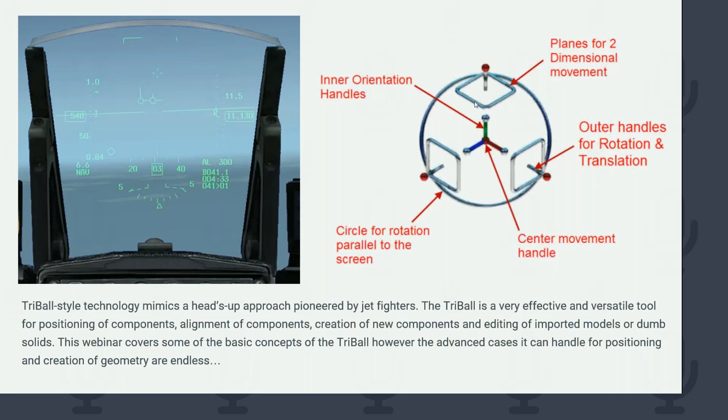This point, the conference will actually be recorded, because I had forgotten to record it from here. But so here we go.

But let's actually talk about what we can do with it. I want to get right into a presentation on the product. So there are a series of webinars that we've done that are really making your design life easy. And so the first one is on feature modeling. So I'm going to jump straight in.

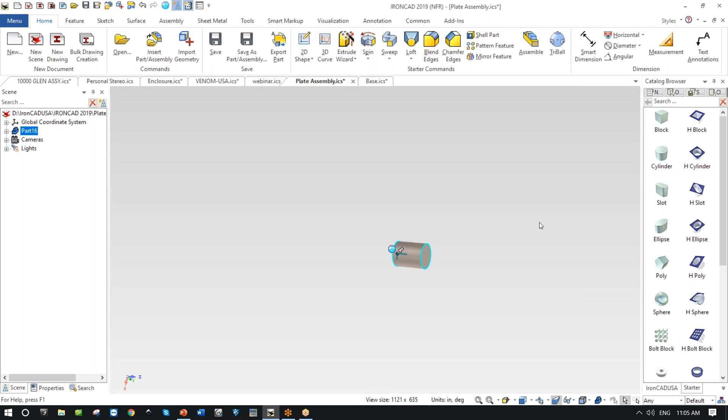But let's just begin by dropping a cylinder into this scene, as you can see. And if anyone's wondering how I'm moving, I have an actual 3D mouse that I use. It's just an old habit. And I'm just going to make this thing. How big do I want it to be? Well, I want this to be exactly an 8-inch plate. And there's my 8-inch plate that I'm creating. No use of the TriBall yet.

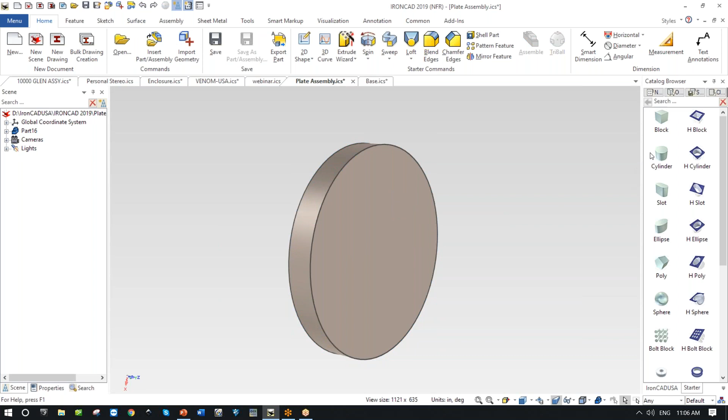But let me start out by saying, well, I want to place another cylinder on the front of this. And of course, I can drag that cylinder out and drop it. And as I go along, I'm going to be showing you some clever ideas, also some advanced features that are really kind of neat. So I just dragged this feature out and I dropped it and it became part of this part. Well, if I wanted to actually locate it after I dropped it, here's something really neat that I'm going to introduce you to.

This is in our catalog system, but because the TriBall is so very useful, I'm going to actually say with this cylinder, whenever I use this particular cylinder from the catalog, I want it to automatically activate the TriBall, and it just did that. So that's kind of an advanced feature, and I can do that for anything that I have in any of these geometry libraries. Anytime I have something in a geometry library, I can say, I want you to attach the TriBall. Why would I want to do that?

Well, as you have already seen, this is our method of controlling geometry. So here I have something that can pull geometry. So I'm moving it into a new position. I can push geometry. I can actually move geometry in 2D space. And you'll notice what's happening now. It's showing a distance, how far it's going from a particular point. So I'm using these handles to move this piece of geometry around the screen. But what I really want to do is locate it precisely at the center here.

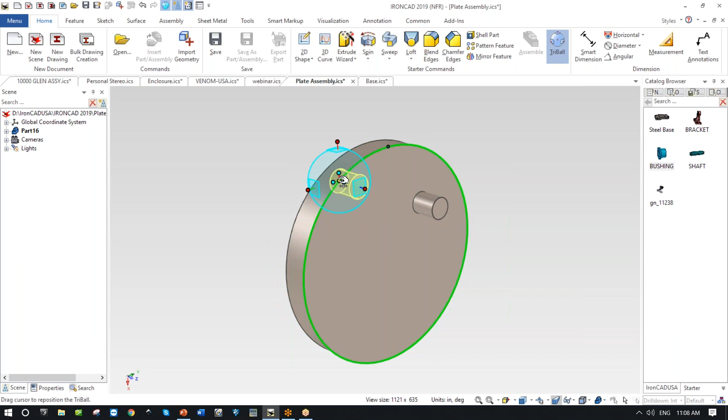So I'm going to come here, and there's a number of different ways of doing this. One way is I can use the intelligence that's built into IronCAD to say, well, can I place it at there's a quadrant point. But if I wait a second, I just found something. There's an actual point here, and it will snap to that. So I located the center. But what if I don't know the center's actually there? Well, right click, move this to the center point of this circle. And so now it's placed it directly on that location.

Excellent. When I'm done with that, I can use the F10 key, which will turn the TriBall on and off. So you can see, hit F10, turn it on and off this way. Or I can hunt and peck through the keyboard. But personally, folks, what I love to do is put it right on my mouse, to be able to get lots of capability. I have a really cool high-lit Razer mouse that looks so neat and lights up, and it lets me have lots of extra buttons. So I put the TriBall right on there.

And as I'm working, by the way, I don't know how many of you, I use glasses, so things are sometimes, as I got older, hard to see. So take a look at what I'm going to do now. I'm just out in the middle of space, and this is all information about the TriBall. Gosh, what might I want to do? Move the shape, position the TriBall. No, I want to change the size, because instead of it being a small TriBall, I'd like it to be medium. Or even better, because this is a webinar on a TriBall, make it large.

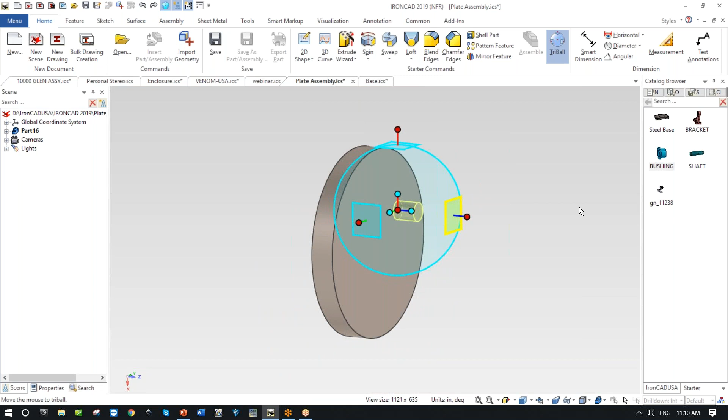Easy way to do that? Say, hey, you're only allowed to move in 2 dimensions. So I've highlighted that front plane and said, you're only allowed to move in that. And if you notice, if I take the right mouse button and move now, it's moving at a location from here. So it's not allowed to move in the Z-axis, if you will. But now I can use that same thing where I say lock and find a center point of this back circle. But because it's limited to move in 2 dimensions, as I said, it has to stay on the front. So there's lots of reasons and lots of tools you can use.

Let's make this a little larger. 2 by 2. Good. This is my little front frustum on this thing, and now I've added it to the part. What else can we do? Well, let's drill a hole. And I'm going to simply come in here and say, what kind of hole do I want? Well, I like to show you lots of interesting things about IronCAD. So let's go and grab a custom hole from a catalog, the tools catalog. And here we bring up a widget that says, well, what kind of custom hole would you like?

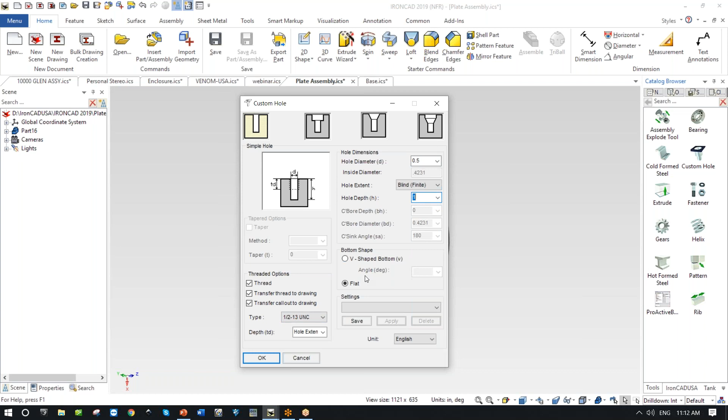I want to be able to have, yep, I'm an inch, so I want an imperial or an English hole, and I want it to be a 1/2 inch. And yep, it's going to be simple. But I do want it to be threaded, so it's going to be a 1/2 inch. I think I want it to be like a 1/2 inch 13. Oh, I said quarter. Let's make it half. And let's now make it a 1/2 inch 13 UNC. The hole depth, oh gosh, I don't know, make it 1 inch. No big deal. And now what I've done is I've created a very simple threaded hole in this part.

But I don't really want that threaded hole in the middle. Really what I want to be able to do is grab that hole, and here's a neat thing. You'll notice it's picking the part. Well, did you know I can actually go and with that alt pick, get right down to that feature, and I'm going right down to the feature. So another way to do that is to say, you know what, here it is. I want to move that.

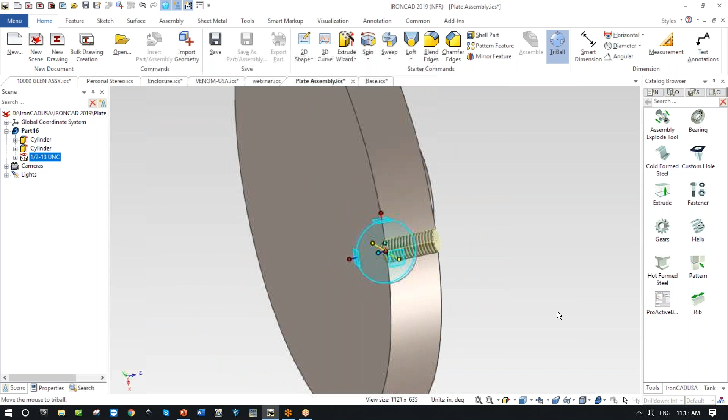So I highlight it from the tree and turn on my TriBall, and now move this TriBall all the way out along this line until you hit the outside edge. Oh, hit the outside edge. Now I've got a very difficult to drill hole, but the reason I did that, it snapped out there. I wanted to just push it back a 1/2 inch from the outside edge. So now I know it's exactly 1/2 inch from there, and I've repositioned my tapped hole to the outside, 1/2 inch from the outside. Well, what else can I do with the TriBall?

Here's a really good thing. I don't want to position the TriBall anymore. What I want to use it for is to create geometry, okay? So instead of coming up here, and this is what's really clever, instead of having to search through features, where's my move, where's the pattern, how do I find this, where's this control for copying and mirroring, it's all here.

Remember, if I go back to the presentation, it's my heads-up display. So rather than hunting and pecking through an interface, I'm simply using the TriBall to say, you know what, unlock this, bring this TriBall in and now use the spacebar, unlock it and locate it now because it's a geometry creation device. Locate it at the center, lock it into position and watch this cool trick.

Now, I've highlighted that center axis, so it's going to move in a circular motion around the center of rotation. And now I'm using the right mouse button. Why? Because anytime in IronCAD that I use the right mouse button, it will automatically bring up a menu. So here, what am I going to do? This time, I'm going to create a radial pattern.

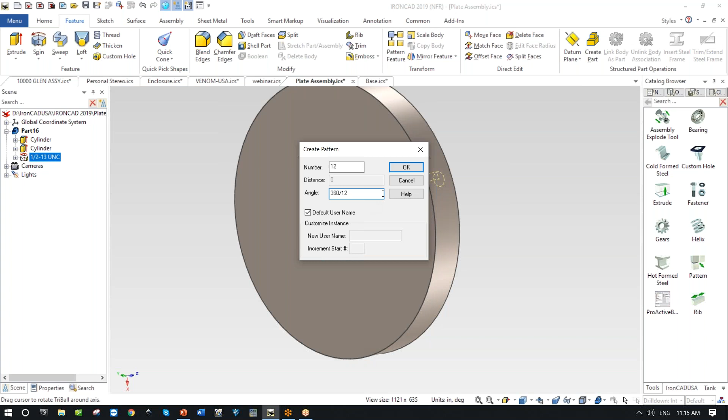How many bolt holes do I need? 12. What's the angle? I have no idea. And so in all of these dialog boxes, I can just take 360 divided by 12, work it out for me. And now I've actually used that wonderful TriBall to create this bolt pattern. So as you can see, I'm using the TriBall to do, and you know what?

Let's look at something else. What would happen if I wanted the exact copy of this part? Let's give it a name. I'm going to click on it, say this is my wheel cover or something. So what happens now? Turn on the TriBall, and let's actually use the inner handles to create something entirely different.

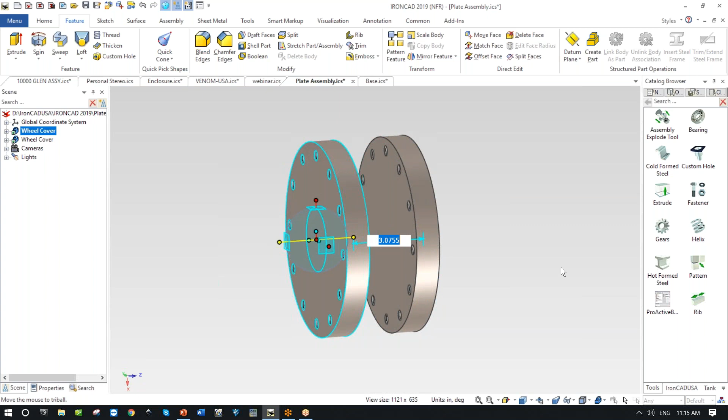I'd like you to come in here, and I want you to create a mirror, a linked copy of this geometry. So now what I've done is I've got two of these. I've got one back to back with the other one. And of course, by the way, any changes, I'm just showing this to you so we can have some fun together. Double click on this.

No, I need 16 holes. So, you know, what is the angle? Don't remember. 360 divided by 16. Go ahead, make that change. And now if you'll notice, I have 16 on the front, and because it's a linked copy, 16 on the back.

So there's just using the TriBall, and not once, folks, in all of the work that I had to do to create the geometry that I'm creating, not once did you see me go to the top and look for, gosh, how do I find, you know, I've simply gone, bring in a hole. I'm simply working with shapes and the TriBall. So that's the first example of what I want to show you, how the TriBall works. And that's actually just feature modeling. And there's lots of different things that we can do.

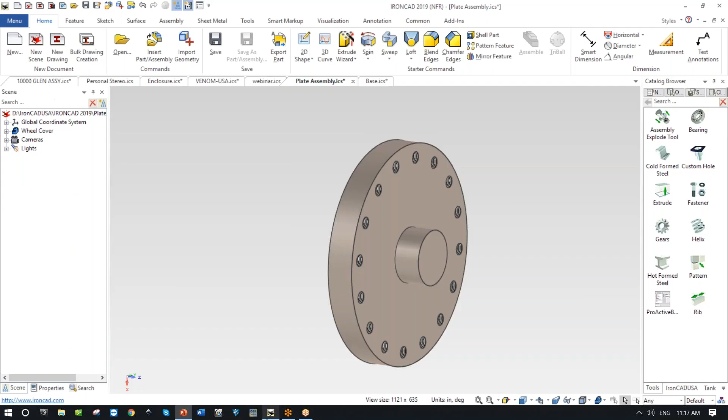Let me bring up the product again now. The easiest way to bring it up is, and who was that again talking with me? Mike. Oh, hi, Mike. Okay, yeah.

Mike, the easiest way to do this is depending on what you're pointing at. So the first thing I point at is a part. If I point again, it goes down into the IntelliShape. And yep, we can move any of these with the TriBall, but let's start out with a part.

I highlight a part, and the non-easy way from my perspective is to go up here and locate the TriBall up here. Can you see that? Yep. That's the non-easy way, because the fact is, if I'm in a different menu, I have to search for it, and I don't like that.

In the tools menu, gosh, oh, it's all the way over here. So I don't want to have to search for the TriBall, Mike. It doesn't make sense for me. I'm busy working. So instead of searching for it, it's on the F10 key, and F10 is a toggle key. So what I'm doing right now is I'm actually using the F10 to put it on.

But if you're an advanced user, Mike, let me just show you something that I think is even cooler than that, okay? And I'm gonna turn on my camera because I have no other way of showing this to you other than, you're looking in the screen. Now, if you look, you can see my fancy mouse. Can everybody see that okay? Yep.

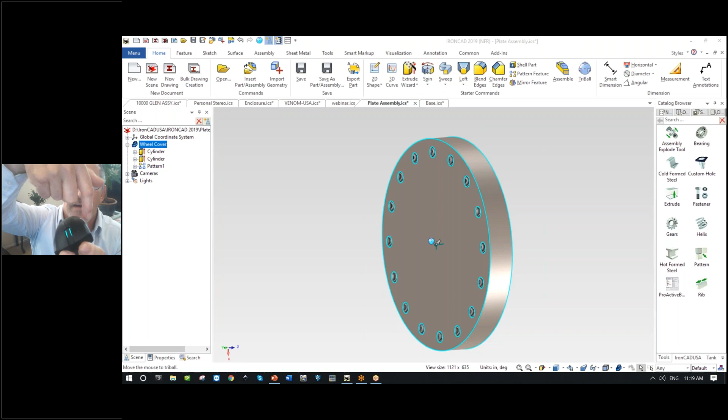And what I've done is I've linked the F10 key to this button and the space key to this button. And Mike, I really appreciate your question. This is why it's incredibly useful. Because as I'm working with geometry, and it can be any kind of geometry at all, if we come into something a little more complex, if I am here and I want to turn it on, I want to be looking right here, and I don't want to move my mouse. I don't even want to move my hands.

So there's the TriBall. I bring it up with my mouse and turn it off. I like that. It's really cool. And the other reason it's really cool is I'm sitting working on this little component right here, and I noticed that the TriBall is way the heck over here, and I don't know why. And because it's way over there, there's some really neat features that you can implement right now, and that's why I want to show this to you, Mike.

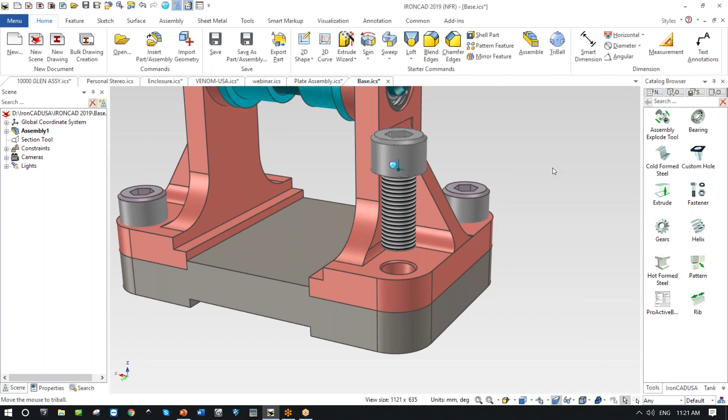So what do I want to do? Take that TriBall back to the anchor. Notice it didn't move anything. I just said, I don't know how you got all the way out there, but I want you to be right where I'm looking. And now I'm just pulling this screw out of the part. And now that I'm done that work, move it up 30 mil exact. Now I'm going to turn the TriBall off. And I can go to work on something else, because I'm going to come up here and work on this.

Okay. And this gives me the ability to work with absolute impunity, concentrating only on the geometry that I'm looking at here. And you'll notice, Mike, turn it off. Come into this part right there, turn it back on again. Come on, baby. Oh, and look, I don't even know where the TriBall is right now. It's somewhere. Reset it to the anchor of this part, and now I'm dragging this part out as well. So as you can see, having it on your mouse is a very, very powerful tool.

Yeah, that menu that you're bringing up, is that a right click? That's a right mouse click. Okay. And I really appreciate the questions, and anyone, just shout out at me if you want to ask questions. That right mouse click, it's really important where your mouse is, okay? So at the moment, I'm floating in space. And I can bring this up, which says, what do I want to do with the TriBall? Because we're in TriBall mode.

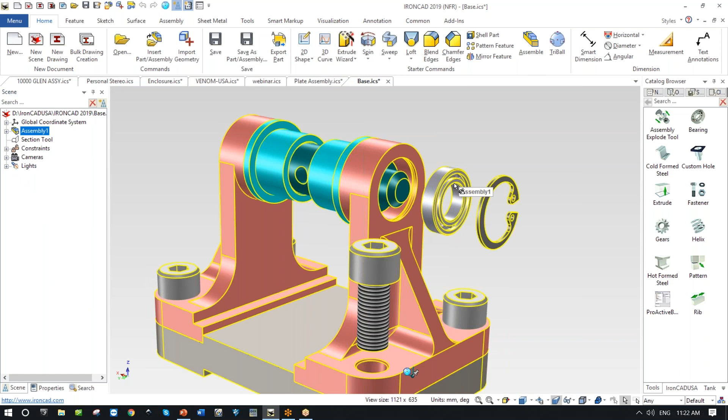And hey, folks, quick warning. When you're in TriBall mode, you can't do other stuff. And I think that's what Mike was referring to. Like, Bobby, I forgot I was in it, and I'm trying to do something else. And sometimes it'll interrupt you and it won't let you do anything else. And why? Because you're in a positioning mode. So you got to be able to turn that off easily.

If you forget, F10 turns it on and off. And as I say, on my mouse, it's really easy that way. Does that answer your question? Yes, it does. Thank you.

Okay. Now, one last thing about these menus. All of the different things that I'm creating here, make it a large TriBall, things like this, medium, things like this, make the style the original, because the original was very thin. Can you see that? You can't really see it as well. And then the new one is a little bit more stylized, if you will, and easier to see.

All right. So now assembly design. And I'm glad I'm in that particular part now because it lets me show you that one of the things that really helps in productivity is using the TriBall to actually create an assembly like the one you see here.

Now, by the way, I want to now pick in a box and I'm moving my mouse to pick in a box, it's not letting me. Why? Because the TriBall's turned on. So now I just turn the TriBall off, select everything, hit the delete key, and I'm ready to start over again. In fact, I don't want you at all. Delete everything in here. I'm just going to start this file, as you can see, and I also don't want a section here, so I'm going to get rid of it.

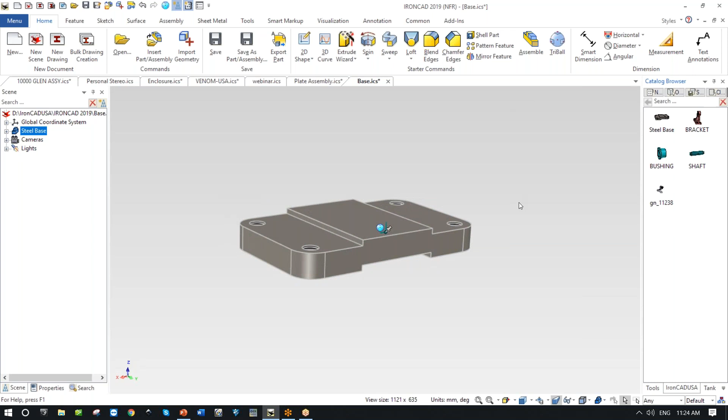So let's look at this marvelous tool for actually creating parts. Now, I don't know if anyone knows this, but when you take a part out of a catalog and drop it, does anyone know where it drops? It drops directly on 0,0,0. So if there's a TriBall here, that anchor would have dropped if I look at the position. If it was the first thing that you placed, obviously this one wasn't because I just deleted that, but here's a quick way to say, just move that into a 0,0,0 position. So it's actually on a datum.

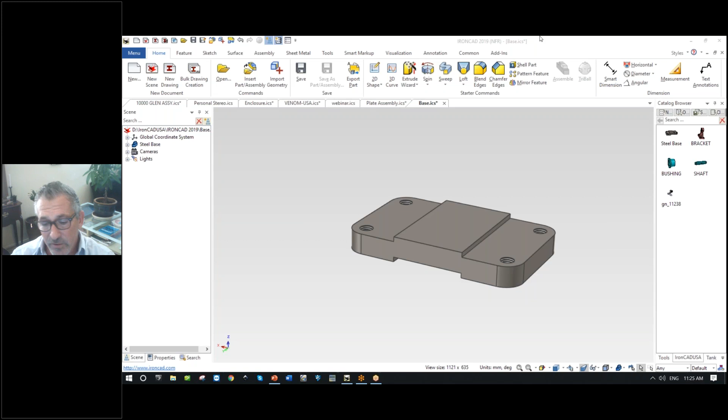But this idea of being able to pick up this part, oh, and other people are seeing me rotate things. I'll turn my camera on again because I've been asked this question before. Just so you could see, I also work with a fancy schmancy SpacePilot. These are a little bit expensive, but there's inexpensive ones. This is a great way to work with the product, by the way, because in fact, I work with a SpacePilot in my left hand and the mouse in my right hand. And what that does, it means I've got all of the tools that I need to create geometry at my fingertips. I'm really never taking my eyes off the screen for the geometry at hand.

So now if I want to start creating an assembly, here's a neat idea. I don't move into an assembly mode in a single model environment. I just say, okay, drop a bracket out here. All right, there's the bracket, and gosh, oh, there's the TriBall. TriBall's floating out in space. And whoever built this, Joe, thanks a lot. This is not located at the origin where I need it. Let me see if I can put it back. All right, put that back to the anchor of the part.

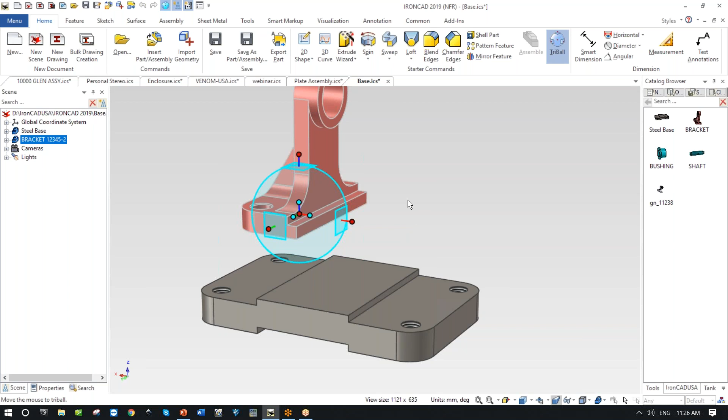Well, that's where the anchor is, but I don't really want it there because I need to locate it from the front edge. So back to that question of an easy way to turn it on and off, because both of my hands are busy. I've got a button on my mouse that says free up the TriBall and move it. And I can now pick it up and move it to any location on this part. Why is that useful? Watch this. I moved it there and locked it, picked this up and put it right here in this vertex right there. Bang. No need for mating, no need for anything. I've simply used this and put it into a position.

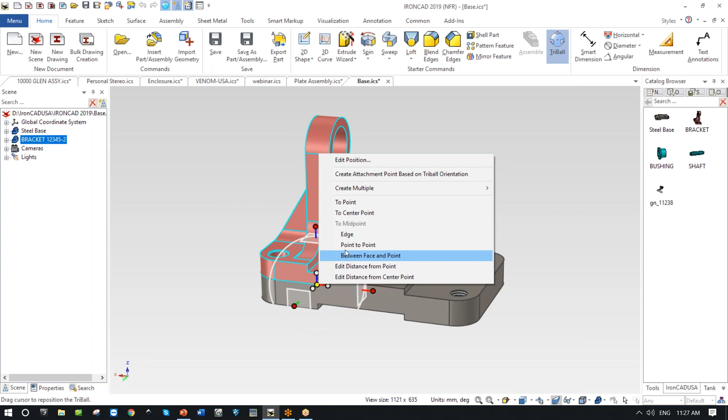Now, do I want to grab a second bracket and put it here? No, I'm going to use this bracket and the TriBall because they're exactly the same. Watch this. Unlink, pick up the TriBall and move it to an edge. And if I touch an edge, by the way, it'll always go to the center. Really useful to know that. There's the middle of my part. Now I'm going to use the TriBall to say, give me a mirrored linked copy on the other side. Cool. So I turn the TriBall off. And by the way, anything that I do on one side is going to be replicated on the other side.

So if I make changes to this model, if I were to come in here and say, gosh, I want this to be a little bit bigger, it's actually changed it on the other side as well. So that's kind of neat, just showing that idea. And I can go on and, let me come in here and go ahead, put the TriBall. Wonderful. Do I need, yep, I'm just dragging and dropping. Excellent. Put this shaft in.

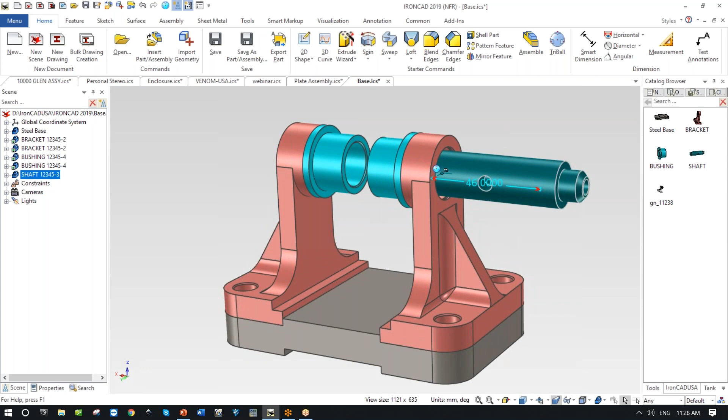Where do I want the shaft to go? Find that center location. No. Oh gosh, I need to move that into a location, but I don't know exactly where. Well, here's some clever tricks. I want to lock this so it cannot move. It can rotate all it wants, I don't care, but it can't move in any direction other than along that line. So now pick this up and move it along to the center point of this. And I've now positioned that directly into this part. So creating assemblies is really kind of a new way to work with this geometry.

And let's look at a hand wheel. What have we got? I've never actually downloaded a hand wheel. That's kind of neat. Ooh, a 3-arm hand wheel. Oh, here, a little 4-arm hand wheel made out of plastic. I'm gonna see what this looks like. Cool. Download this. I know nothing about this geometry, folks. Really, I know nothing about it. It's third party. I don't know if it was designed in SolidWorks, in CATIA, I don't know where it was designed. All I know is go ahead, show me this file, and I'm going to bring it on the screen just so you can see what I've got.

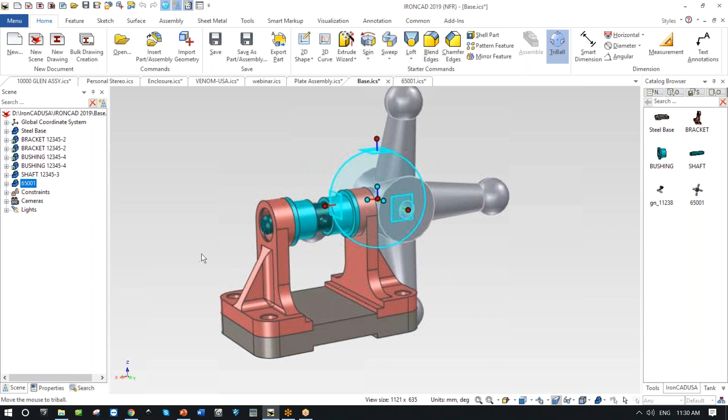And now what do I want to do? Allows me to show you some kind of neat things. I want this to be set up so that this handle is directly opposite that, like that. Now, I don't know if anyone watched what I just did, but it was kind of neat. So I'll show that again, and this is sort of an advanced function that I just used. Because this is sitting there, you see this front face. I need that front face perpendicular to this. So I can actually pick on the inner handle and say, gee, I want this perpendicular to this face. And see what it did, right? It just picks it up and makes it perpendicular.

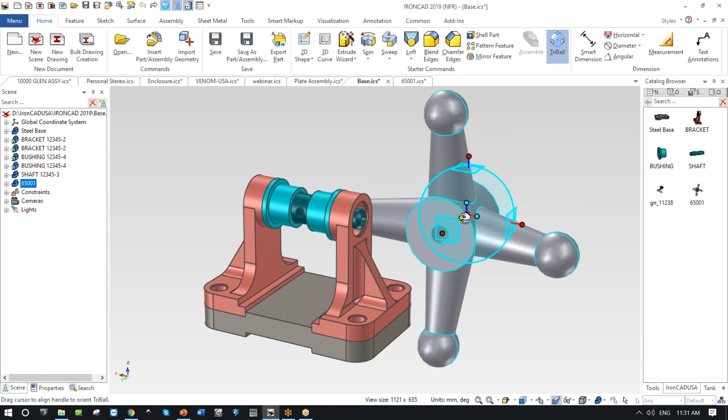For those of you who are advanced, because I want to show advanced tools as well, you could just do this. I'm going to highlight that little handle, the one that I right-clicked, left-click on it, and just touch the face that it's supposed to be perpendicular to. Super fast way of working, okay? And now what do I want to do? So I just want to take this part, put it to the center point here, and now I've added a marvelous handle to my design, which is kind of silly, but that's the idea. I just took it out of a catalog, and we're actually using the TriBall.

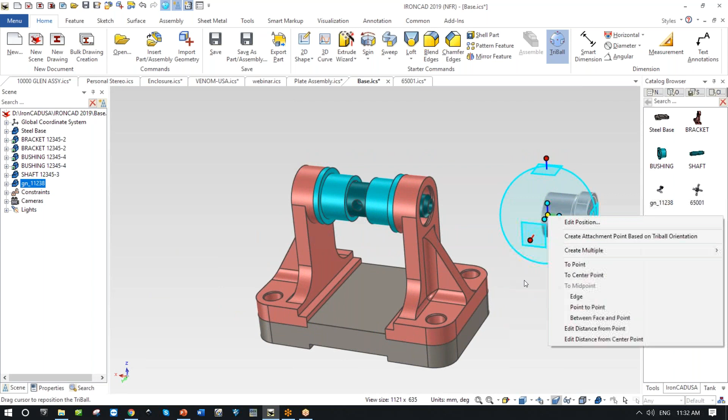And that's the true test. I know nothing about this geometry. It's very similar to the other. This morning I was just looking at it, and I grabbed a different handle and did the same thing where I said, I want this perpendicular. Ooh, went the wrong way. Folks, just right click and say reverse. All right, so I really have tremendous power with this tool, and not once am I sitting here and going, how do I move this?

I'm doing everything as if I were a pilot. Move this around to the other side. So I'm using it also for mechanical design. So you can see, putting things together, and not once have I gone into an assembly modeling. I'm going to do it right now to show y'all.

I'm going into the assembly modeling mode here. Not once have you seen me go into positioning where I had to actually do constraints on this. I'm putting this assembly together without doing any constraints, only using the TriBall. So that's a really exciting trick to be able to convey this idea that I can do assembly modeling with that as well. But it's not just limited to IronCAD or SolidWorks parts or dumb, you know, whatever geometry.

I can also use it to do really interesting cut and paste. And so I'm going to show you an example of that right now. And let me just see if I can remember where I was. This is one of our webinars we did.

Any questions from anybody? Because I'll stop right away if you need questions. Let me just see. I'm going to mute you for a second, Matt. Let me just get this muted for a moment.

There you are. So I need to do cutouts because what I want to be able to do, I think I need actually to fit these plates. I've shown this in a different webinar in the front of this enclosure right here. How do we do that? Well, with the TriBall. I'm going to come into this part, and I'm in a separate part here. And what am I going to do?

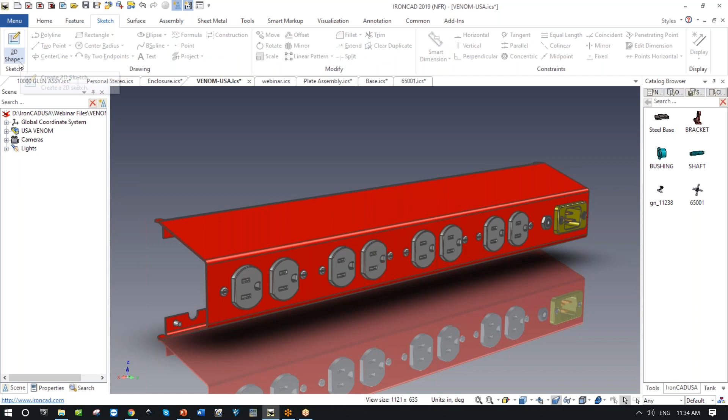Well, I'm going to come in here and make a sketch. I want to do a sketch on this shape right here. Where am I? Hey, don't argue with me. Come here. I want to do a sketch on this front plate right there. Good. That's the sketch I want to do. And show me the part. Here's the part, because what I really want to do is I want to come in and I want to project everything that's on this front face.

Sorry, folks, I just need to go in a little. I want you to project all that geometry and hide. Oh, so that's what I want to borrow from this part. I need to borrow that. So I don't need this. Come in here. You I don't need. You can go away. Oop, undo that. Oop, too much. I need you. I don't need that. I don't need this line. I'm only going to take the geometry I actually need.

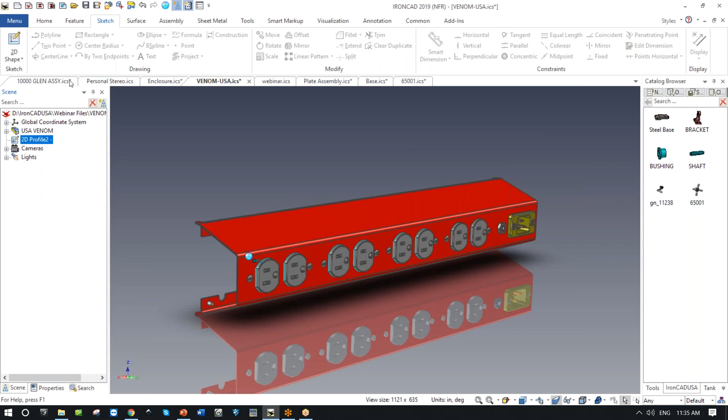Grab that. I want to copy it, go back into this enclosure, and then say, you know what? Whatever this was, I need to paste what I just did there. It's pasted from an entirely different file. And rather than go into the details of this, I'm just going to come in here and do the same thing. I want this to be that way. Notice I just did it with one click. Good. And folks, just be a little patient.

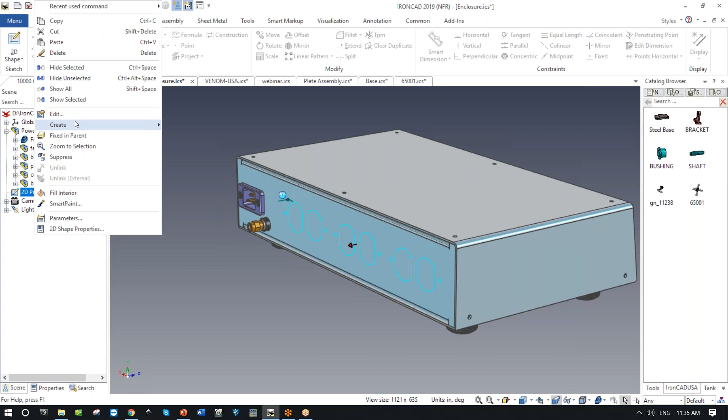I'm going to just say, place this on that face. I can be very exact about how I'm doing it, but I'm really just showing you a neat idea. What can I do with a 2D sketch? Well, I've borrowed that sketch. I can create an extrusion that's going to cut through this part right here on the front plate, and go ahead and do that.

And I've now used the TriBall to cut and paste a sketch from another part into here. So any geometry can be taken and placed and moved around using the TriBall. All right, so that's that idea.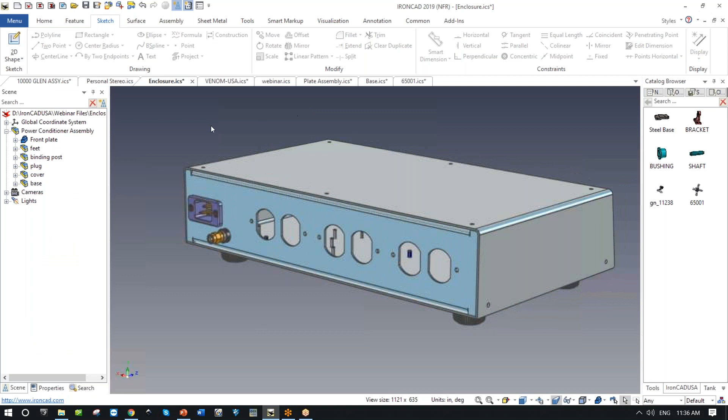And then before I overstay my welcome, let me show you one last thing, which I think is really cool, and that's using the TriBall for direct editing. And I've got another great example of that here. This was my silly personal stereo that I created, okay? And this webinar is also available, and what's kind of neat about this is that it's got some pretty great capabilities.

It was actually created, folks, using some very simple shapes. But let's take a look at what we can do on this part. Well, I'm working on it right now. I want you to come into this face right there. So I'm on that face, turn on the TriBall, there it is.

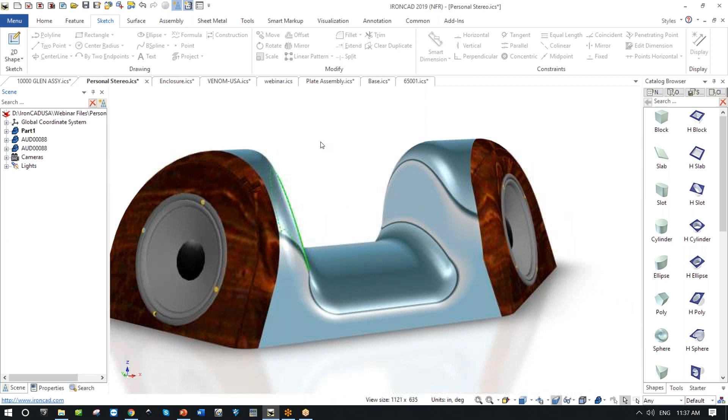And now I don't really like the angle, so I'm gonna come in here and I want you to just move this a good 10 degrees this way and go ahead. And notice it's changing entirely how this is working. I want this face, again with the TriBall, I'm gonna tilt that one back a little bit. And let's see if I can, nicely done, this is beautiful. What else can I do?

So I'm actually direct editing on this part, and you may say to me, Bobby, that part is yours. You own that, you created it. So of course you should be able to do that. Well, but what if it's a part that I don't own? What if it's something that's an entire dumb solid? It's got no information in it other than BREP, a boundary representation of a surface. That's all it is, a bunch of surfaces.

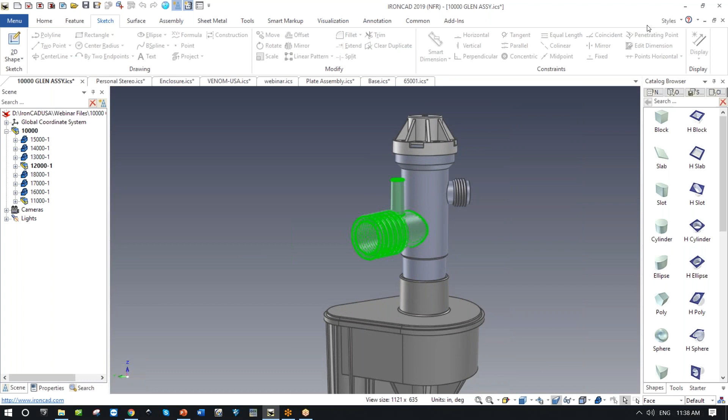Well, same holds true. I know it's a bunch of surfaces. What I'm going to do is make changes on those by simply saying, I only want to select on a face. In a box, pick all of this, including the outside, and let's make sure we get the inside face as well. Good. How am I going to move that? No, I'm not going to search up here for commands. I'm going to simply bring up the TriBall.

It's in the wrong position. So what am I going to do? Unlock it with the space bar, right click on this and say move this to a center point here. And now simply take this around the center. I need it 45 degrees over here because they've said we need to move this thing, and go ahead and move it all. And now what it's done, pretty magical, by the way.

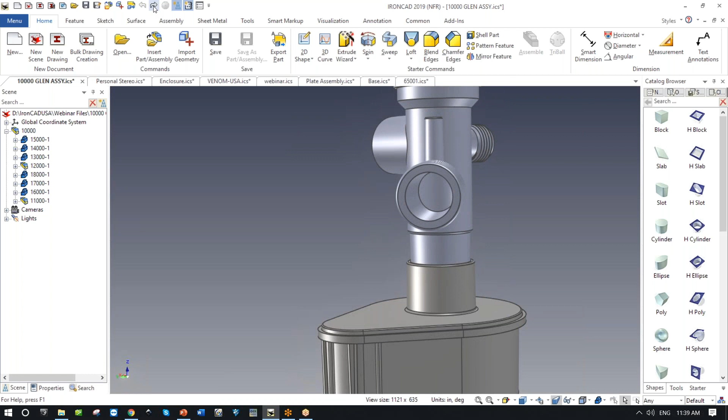It moved all of this geometry from where it was and rebuilt all the whole geometry on the inside. So you see kind of a neat capability on something that had nothing to do with me. This is not my geometry. I simply used a TriBall to move this set of faces from here to here, and notice that it rebuilt everything and did the proper holes. So it's really kind of a neat modeling tool.

But if I go back to the thing that I was working on, oh no, I mean my personal stereo. Last thing I want to show you about the TriBall is let's create an assembly of all of this and just say create an assembly, call it my personal stereo. And now let's use the TriBall to create a 4-speaker system. Well, this is actually in the wrong place. So what am I going to do?

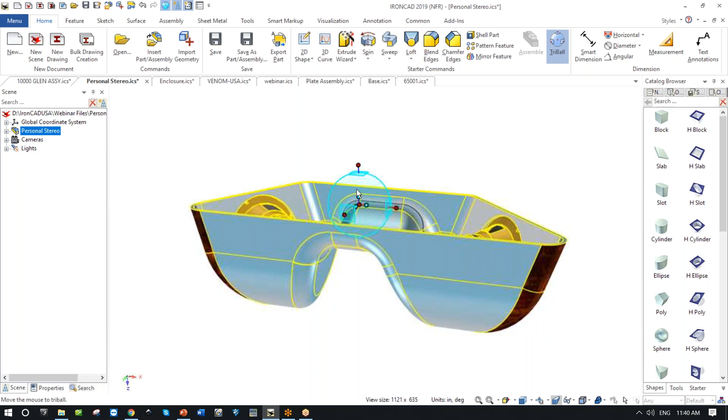I want to lock it until it finds, hey, you, don't argue with me. I want this to be able to move, unlock it to right the top there, lock it again, use this mouse button to say, create a linked copy of the whole assembly. So now I have a top and a bottom. I've got a 4-speaker system, kind of neat.

And what's of course magnificent about everything that I'm working on, any of the changes that I make with the TriBall to the top, of course, are going to be reflected. Like, you know, I really do want this to face the front a little more. Let me see how it does that. Beautiful. And notice that everything in the bottom is, no, undo that. I didn't like the way it interrupted something here.

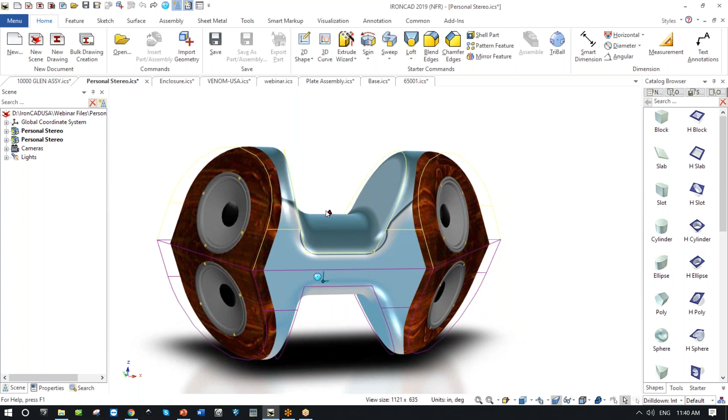Maybe, but you're getting my drift. You're seeing what I'm trying to do. I'm able to change things, and it's really kind of a fun technology. And there you go. And at any point, if I want to slice through this, by the way, I saw a question on the forum the other day, nothing to do with the TriBall, but it lets me show you all something really neat, and that is our sectioning capability.

So I'm going to take this and just create it and say this is one big assembly. Okay, my crazy boombox. So there it is. And what I'm going to do now is I'm going to highlight the whole assembly, and what I'd like to do is section through it. But I want to section it based on parallel to a face, maybe something like that. Let me do that. And which face? Well, let's just go through the front.

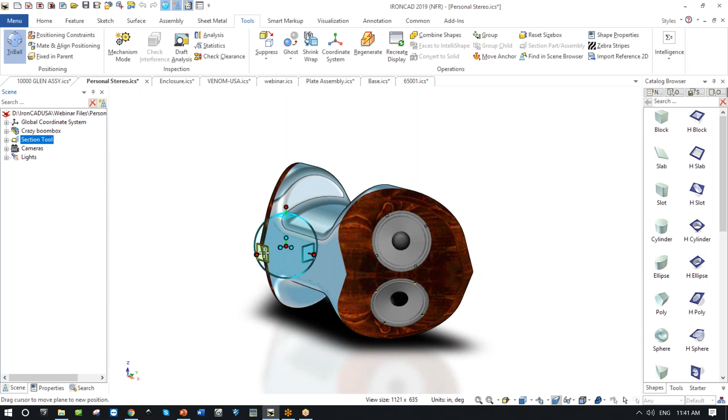Now, nothing's happened. Why? Well, because we're not moving it yet. Let's move it with the TriBall. And what I'm actually going to do is slice through this part, as you can see now, because I'm able to very easily use the TriBall to go through this part and say, how well have I built it?

How are things working? And at any point, guys, this to me is the amazing part of it. At any point, of course, I can pick the TriBall up and use it to do some pretty magnificent things like this. So now I'm chopping through this assembly this way, and I'm being very sloppy about how I do it. But you all can see that I can really analyze what's going on very easily with this magnificent tool. I work in a lot of different CAD systems, and it just makes my life really easy to do this kind of work.

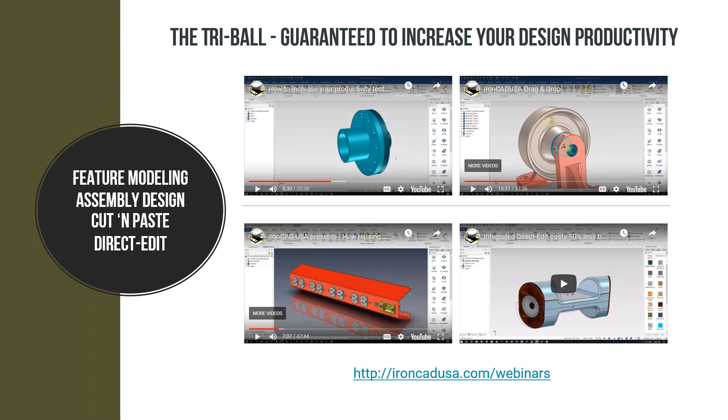So let me go back to this. I hope you're enjoying what you're seeing. I've shown you an example of how we can use the TriBall for feature modeling, assembly design, cut and paste modeling, where I grabbed the sketch and used it, and also direct editing.

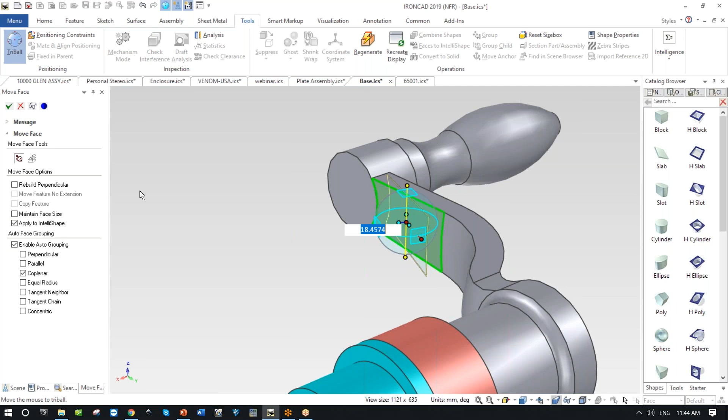This handle, as an example, I didn't create this inside of IronCAD. It was created in a different product, but I still have the ability to make changes to it at any time, and be able to come in here and say, I want this to, and I don't know, I'm being crazy now, but who knows what'll happen there. So I'm making changes on the fly to geometry that comes from anywhere. So that's really important to me and increases my flexibility. I can work with anything.

It increases my productivity and really improves it because, I haven't shown you that, I'm actually going to show that tomorrow, you can use it to create animation paths, cable and wire runs, inserting tubing and piping, great examples. And here's something that's really neat. If I pick up somebody's design that was kind of garbage and it has history problems or parametric, I don't care. I can just direct edit and change it and make it the way I want.

And finally, improving the ease of use. In all the other products I've ever used, I needed to have a plane. And this was a big deal. I needed to have datum planes in order to make things position. Not with the TriBall. The need for a plane is entirely eliminated.

Hey, Joe, did I miss anything that you wanted to see?

Igor, or Matt, everything cool with you guys? Yep, I had a quick question. Sure. How did you connect the TriBall to your mouse? Say that again, please. How did you connect the TriBall to your mouse? This is Matthew, right? Yes.

It's really, really easy. I want to show you something here if I can. I was working on a, let me just see if I can open this up for tomorrow. Where is, just looking at something. See if I can find it. I had a presentation. Well, you know what? I'm going to be lazy. If you'll forgive me, I'm going to show you the picture right now, rather than drive you crazy. Bear with me for a moment. I just want to find it so you can see it. And I apologize for anyone looking at some of these ugly pictures.

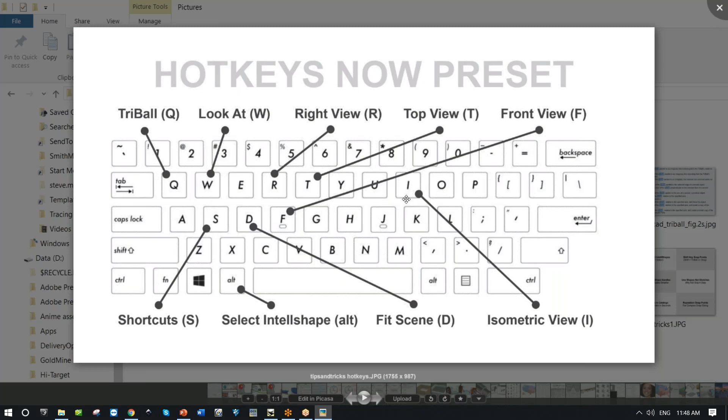But this, so the TriBall, there's some really neat, the right, top, front, ISO. This is something a lot of people may not know: if I'm in a scene and I go to the right view, the top view, front view, the isometric view, turn the TriBall on and off, double click with your mouse. Say for example, I'm all the way over here and I'm lost. A double click with the middle mouse button brings this into the middle of the scene. If I hit ISO, middle click, top, middle click, it fits, and turning the TriBall on and off that way. So those are some of the hotkeys that are kind of neat.

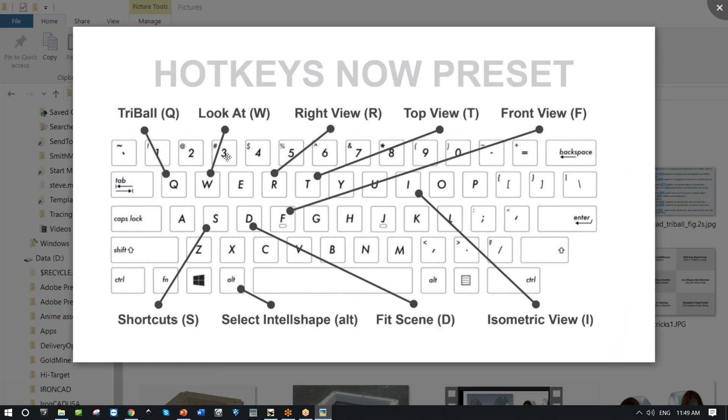And now coming back to your question again, because I do like to answer these things. I have a Razer mouse, so let me see if I can launch this. I set it up so that if I look at my button, see what's happened here? I can just set this and I rebind the key to F10. That's all I did, and then save that. Any of these mice you buy will normally come with this type of program. I rebound that key, as simple as that. You got that, Matthew? Yes, I can see it now. Okay. And that made it really, really easy to work with the product.

What model is that mouse? I think it's a Razer Mamba Elite. Wow, coolest! It is super high speed. It's a gamer mouse, so yeah, I know that. But what I'm getting at is I'm using it because that's what I do.

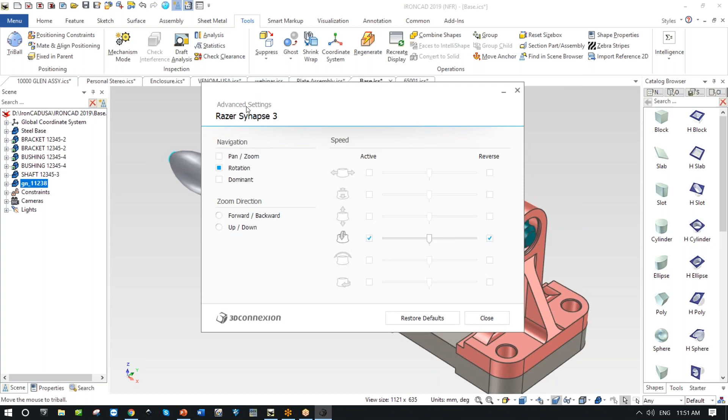And the other thing I'm working with, just to show you, let me bring up my menu. I'm showing it right here on the screen. This is my SpacePilot Pro, and I use a SpacePilot because it's so powerful to use with geometry. As you've watched me this morning, it doesn't matter what geometry I'm working on, I'm able to get there really fast. Now I can do all of this with the middle mouse button, or I can hit F2 and pan, F3 and rotate, F4 and zoom in and out. That's possible. But my preference is always to just keep my hands here. Go ahead.

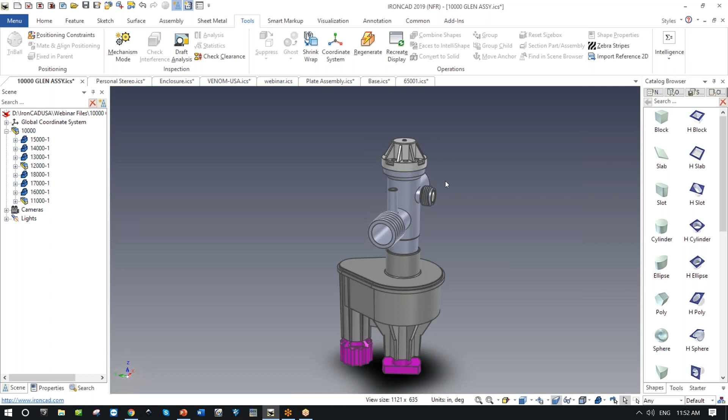Somebody have a question? Yeah, show us how that SpacePilot works. I mean, you know, how you move things around with it. You know, I actually created a video, I'll put it on my YouTube channel. It'd be hard for you to see, but just so that you can understand, I'm just going to hold it up so you can see it in front of my face.

Basically what it is, this center handle, you can see that, it's quite a heavy device. If I pull up, the part on the screen actually pulls up. So if I'm looking at this, and I don't know if you can still see the picture, if I pull this up, it pulls it up. If I push it down, it pushes it down. If I rotate and twist it, it twists the part around. If I push it forward, it's tilted. So it very much is like flying an aircraft. It's a pilot. It really is like flying an aircraft.

And the combination, folks, of being able to use something like this where I say, oh, I'm going to reflect on this part and use the TriBall with all these tools. You know, I'm sitting back here and I'm changing geometry that's not my geometry and not even thinking about it. I'm just thinking about how to design something, which makes a huge difference. And it's very much like this.

I do like this example and the idea that my head's up. I'm concentrating on what's happening in my design, not, gosh, I'm about to land the plane and how do I lower the flaps? So it's all right in front of me. And that makes a huge difference when you're working. Go ahead. Any question? This is Mike again.

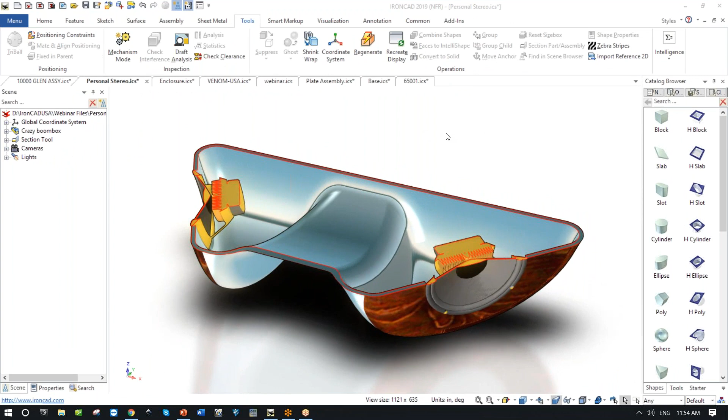I have a need. I'm designing some circular devices where what I want to be able to do is just take a cylinder, say an inch in diameter by an inch and a half tall, and put a rounded end on the top and the bottom of the cylinder. Is there an easy way to do that? There sure is. Who's talking to me right now, just out of interest? Mike? Oh, Mike. I'm running a 3-hour class tomorrow. I'm signed up for it. Oh, cool. Because if I were going to do it, there's a couple of ways I would do it.

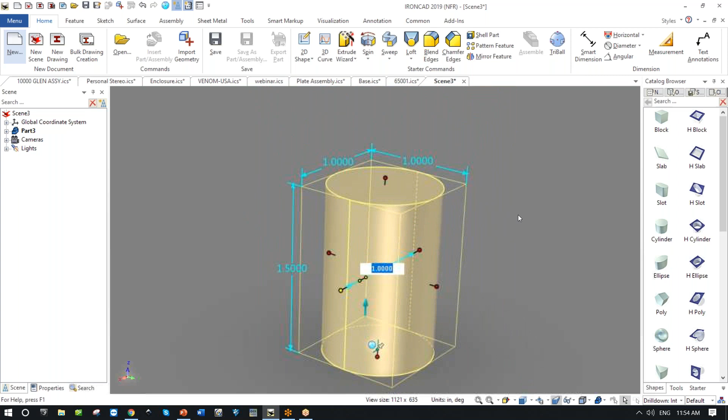So, if I'm just looking at this and you said it's a 1-inch cylinder by 1.5 inches high, right? Something like that. Yeah. And a couple of ways you can do it. And how do I control? I'm sorry, I wanted it a hollow cylinder. Yes, you could do that. We actually even have shapes for that. So, in the advanced shapes, there's part of a cylinder or hollow shapes like this. Yeah, that's what I'm looking for.

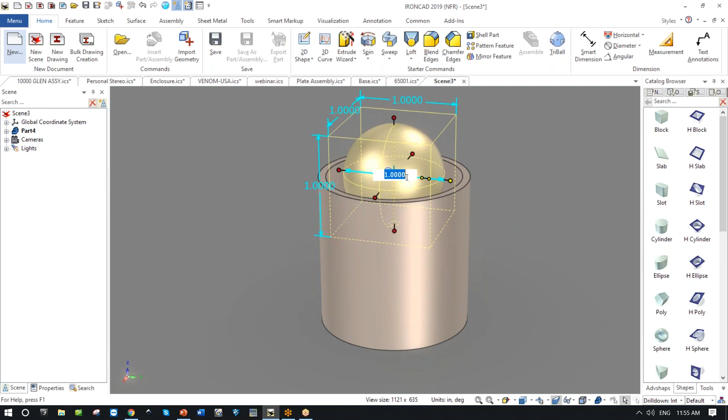But an inch and a half tall and an inch in diameter, and then with a rounded edge, where the rounded edge does not decrease at all the interior diameter. So it's rounded on the... Is it like a rounded end cap? Yeah. Well, I mean, I say that. So kind of like, think about like a pill. No. It's just not like this. I want like a torus around the top and bottom of it.

So the torus is bigger in radius, or should I say, in the thickness of the torus, than the thickness of the cylinder or the pipe itself. Let me just see something here, because again, I'm making it up as I go along, but some of the ideas I would have would be something like this. If that's the round there, right? No. It's still going to be flat across the top, except that edge is going to be thicker and rounded, and the inner diameter is not impinged in any way by the roundness of the edge.

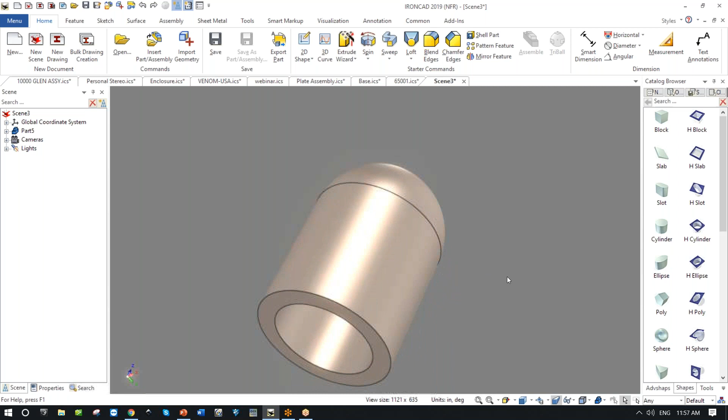What I have done is I've attempted to put a torus on the upper and lower edges, where the diameter of the torus is a little larger than the inner diameter of the cylinder, so that the inner diameter of the whole thing remains totally unobstructed. Yeah. So you wanted... Go ahead. If you get rid of that sphere up there on the top. Okay. And start with a pipe. Bobby, is there any way to modify a fillet to do that?

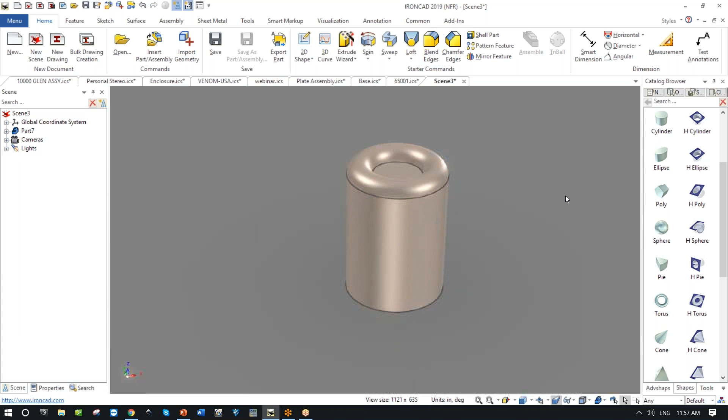Possibly, yeah. I'm trying to understand what it is that we're working on first. Okay. Give me a pipe. I can, but I might do it this way first. So is that going to look like that? Yeah, but no. See, because that makes the internal diameter of the pipe smaller. No. I would do it this way.

Pipe. I would do this, and I'd make it. Let me just come out. Oh, sorry. Let me do things right, because it's actually interesting. I love doing this. Let's just see real quick. Get rid of that. How big was this supposed to be? An inch and a half tall and an inch in diameter.

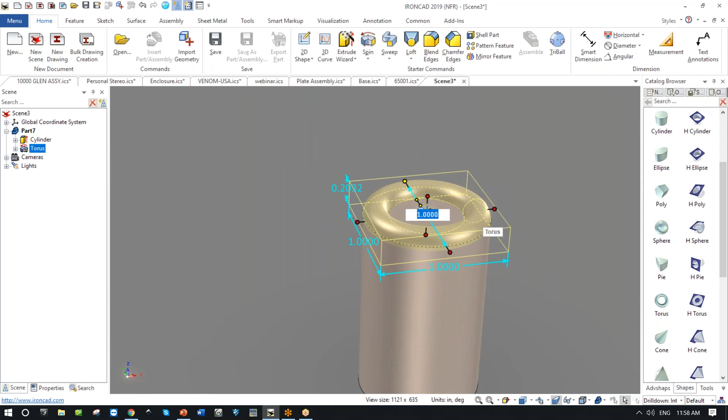Oh, sorry. Thank you. So yeah, I'm going to get this right, just so I can keep doing it correctly. And again, this was supposed to come out to the outside edge, right? Like that? No, further. In other words, the inner diameter of the torus should be equal to the inner diameter of the hollow cylinder.

See, what I was going to do to show you, just as an idea, rather than do it the way you did it, I was going to take this pipe and make that 0.75, so it's got a wall thickness. And then I can use that to create this. Yeah, not what I want.

I want a thin-walled hollow cylinder, in which I'm protecting the edges of it so they're not sharp by adding a torus. So the torus will stick. Can I jump in for a second? Is that Mike Ramsey? Yeah. So if you have a tube, you want a full round on the top, is what you're asking for, correct? You want a full fillet all the way around from the outer diameter to the inner diameter?

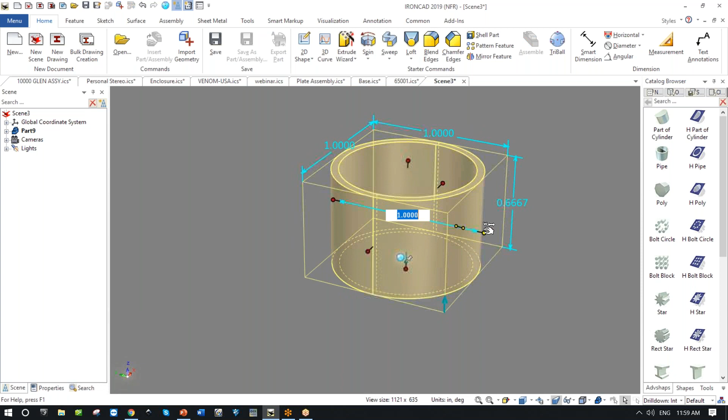Well, no. I need additional thickness for the edge. In other words, if I just do a fillet on the edge, the pipe is a thin wall thing, so it needs some protection. Can't you just extend the torus out? Well, that's what I was wondering, if that's the easiest way to do it. If we make the torus bigger, a simple fillet won't do it. It's got to have that torus smack down on top of it.

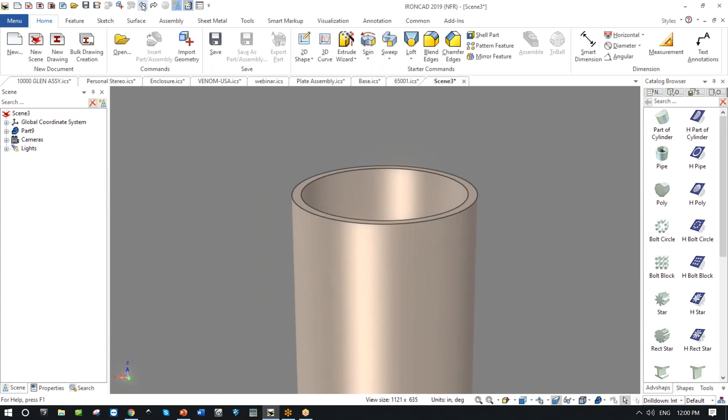You want to extend it past the cylinder wall. You want a lollipop? Is that what you're after? Well, I don't know about a lollipop. Maybe you could, do you have a sketch or a drawing you could send? Yeah, that would be great, because we're obviously missing what you're after. Okay, is this a cylinder or is that a pipe?

Oh, I'm using this as a cylinder, and I'm going to make it one by one, so we don't get lost, 1 inch by 1 inch. Okay. And the question I was going to raise is, what are we actually looking at on this part? If it had a wall thickness, what would the wall thickness be? 30 thousandths. That's what I wanted to know. Okay, wait, what happened? Let me do that again.

Edit this. By the way, I'm going back and saying I need to open up top and bottom. I'm doing it with the shell just so I don't have to mess around. And now this needs to be rounded on top. No, now take a torus that's just slightly bigger in diameter than the inner diameter of this shell cylinder. Yeah, like that, but make it bigger in diameter. Make the wall thicknesses smaller. You're close there.

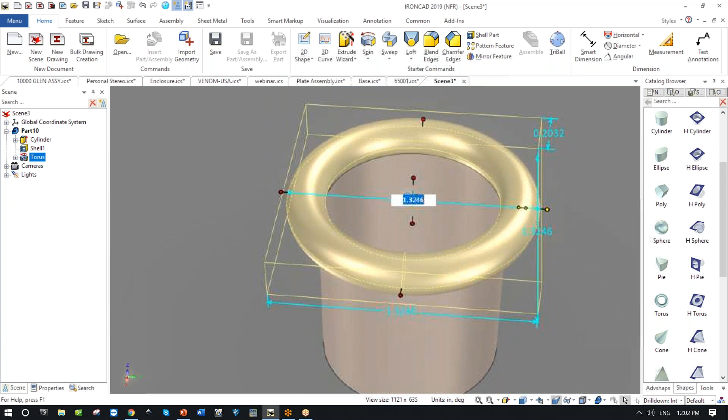If you push it down a little bit, just lower it down a little bit more, and make it a little bit bigger in diameter, and the torus itself smaller. Make it a real skinny donut. Right now, the donut is too. You want the inside of the torus to be the same width as the cylinder. Yeah. Okay, now just tighten it up a little bit there.

No, that's too small. I made it the same as the wall thickness. No, it's got to be much bigger than that. That's what I'm trying to get around, is the thinness of the wall. I need it to be thin so it's flexible, but at 30 thousandths, when you're looking at ABS or whatever, that can be pretty sharp. So what I'm trying to do is put a rounded edge on it.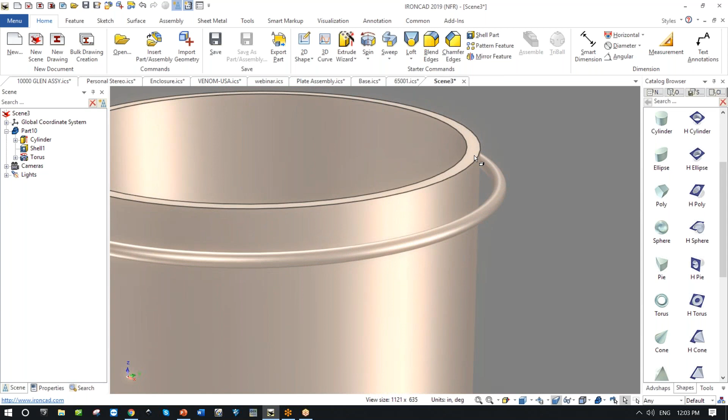And the inside of the torus has to be the same size as the inside of the cylinder. Yeah, so it doesn't obstruct in any way the cylindrical opening. How do you make it? Like how do you actually make that part? On a 3D printer.

Gotcha. Okay, gotcha. Yeah, no, I see. Okay, yeah. You know what? I'd love to see. Can you send me a picture of what you're trying to do so I can actually come back and look at it? Because I know there's lots of ways to get there. This wasn't right, because what you got there looks pretty decent.

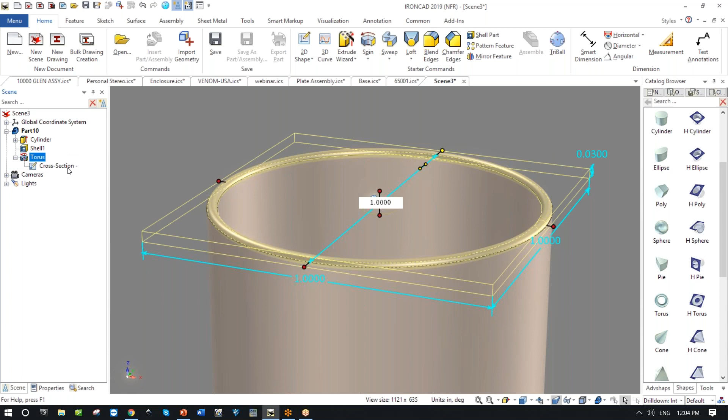How do you make the torus fatter around? I mean, not the diameter, but the actual thickness of the torus. How do you change the thickness? I always want you to know something really interesting about IronCAD, and this is what makes it really special. Did you know that everything that you're seeing in IronCAD is actually based on a sketch? So if you wanted to change this sketch, you have that ability at any time.

So, whatever this was, I can make this bigger, smaller, like I'm making it way too big. You get my drift, right? We'll undo that. Okay, so I can actually change anything. And if you know what you want this to be, I would have the ability to change this, even to the extent of doing this. And I'm going to be silly here, forgive me for just being a goof, but why not?

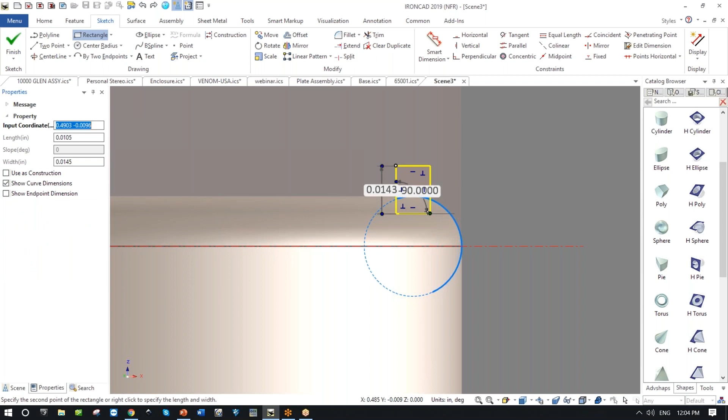I come in here and I'll say, okay, trim away what I don't want. I want this gone. I want this gone. I want this gone. What did you just do? Undo that. Oh, trim. Why are you moving? You're not allowed to move this. Why does that move? Anyone know that? It's weird. I find IronCAD does funky things to me periodically. Periodically, it's doing funky things to me too. I don't know why it would move this particular thing.

Can you lock on that center point, Bob? What's that? Can you lock the center point of the diameter? We'll let you lock that. It did, but let me just try trimming. I just want to trim away that. Oh, my fault. Hang on for a sec. Hide all. I don't know what I'm picking on. Oh, let's get rid of that too. Has that got everything I need? Yeah, it's trim. Oh, I've got too much extra stuff here. This may give me some horrible problems now. We'll see what it does.

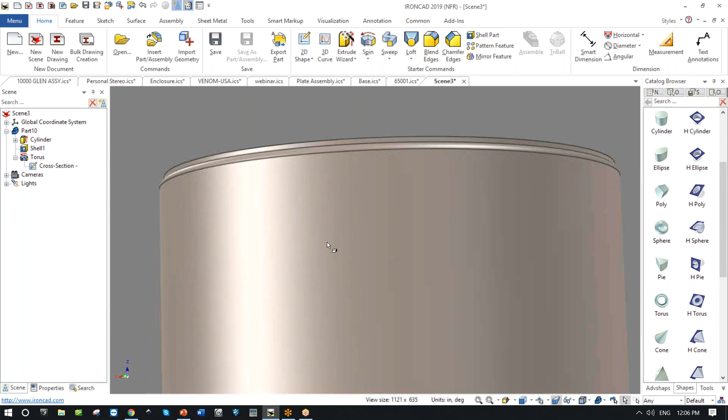But no, it worked. See what I did? I just had extra geometry on there. I actually used this sketch to create this new shape. Can you see that? Yeah, that's cool. I'm saying you could get in there and actually draw whatever it is you want, and then you've got the answer. Well, cool? That's pretty neat.

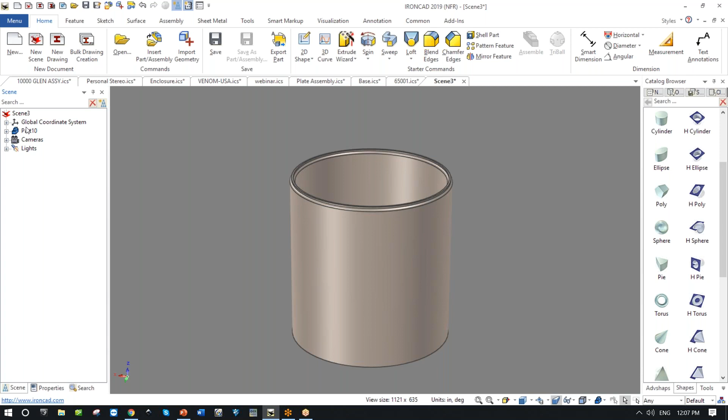Now, a question. Sure. If I want to open this up on one side, in other words, basically slice it top to bottom in one place, and that way, if I print it in a flexible material, I can just open it up. How can I slice that shelled cylinder vertically, so that it's now not a real cylinder? It's a cylinder minus a thousandth of an inch or 10 thousandths or 20 or whatever.

Oh, the easiest way, really easy, for me, is just to use a shape. I would just take a block like this. Okay. We're placing a block, and I'm going to be really careful with this, where do I want it to go? This block now, and I'm just going to show it to you. I'm showing it to you in a silly way, but I think you're getting my drift.

Sure. I would just take a block like this, make it exactly whatever you want it to be, 0.050 or whatever the width is supposed to be, and I would do it exactly like that. Okay. You know what I'm saying? Because I'm just doing it easy. Now, boom, and now I've got these two parts that could be opened up. Yeah.

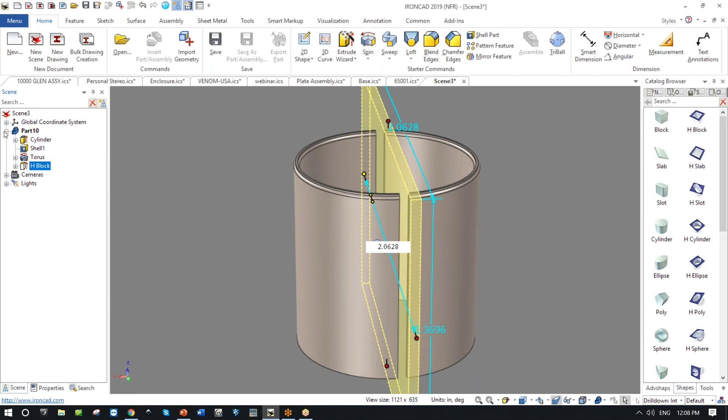Now, if I wanted to rotate one of them so that the front, if I wanted just to rotate, say, the half on the right around the center axis so that the opening is bigger. I don't want to get rid of material, I just want to rotate it. Can I do that with the TriBall?

I think so. Let me just see if I can do all my fancy schmancy stuff. Yeah, here we go. I'm just being really sloppy though. Okay, I grabbed all those faces, right? Now see if you can rotate them. I turned the TriBall on. I'm going to put it back to the center point, doesn't really matter where it goes, center point there.

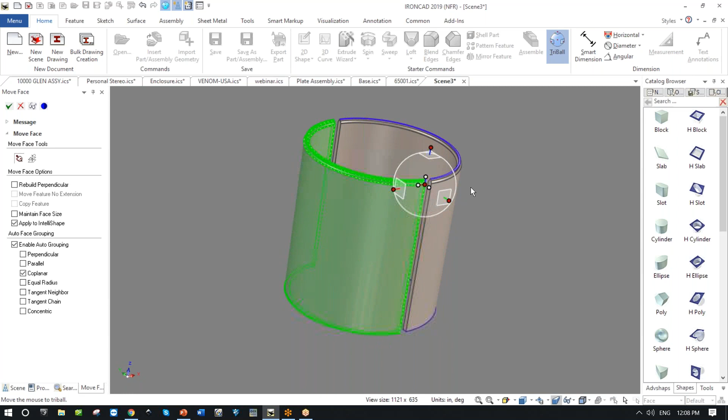And, oh, I don't want it there. No, I want it at the back edge. Yeah, exactly. Can I do this just like that? Yeah, that's what I wanted. Sure, I just did direct face modeling, the same thing that I was teaching you in the webinar here, where I said this direct face modeling, this thing I did down here. That was exactly what I just did.

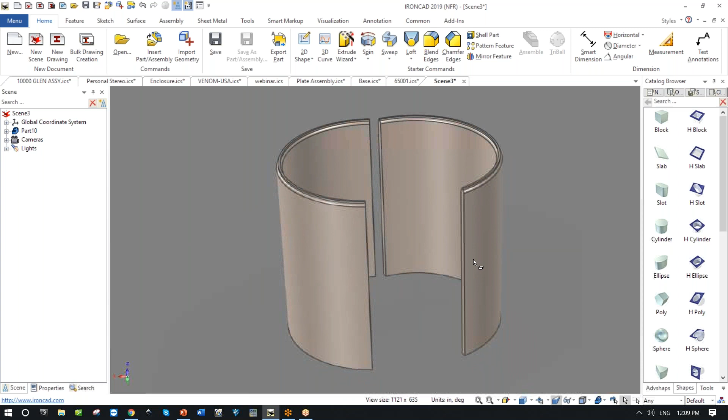I said, I don't want this to be all locked in. So now what I've done is just turn this into dumb geometry for me, and open it up. So the answer is yeah, you can absolutely use the TriBall for that. Now, if you were to make the block, the H block that divides them into two halves, remove it from the back seam, just by making the block smaller.

Of course, I just want it to come back. See, that's all of that. Now I've closed it up again. I have to have some opening there, but this doesn't have to be a block. This could be a wedge, if you will. You know what I'm saying? It could be a thin wedge, and then I'm just opening up more in the front.

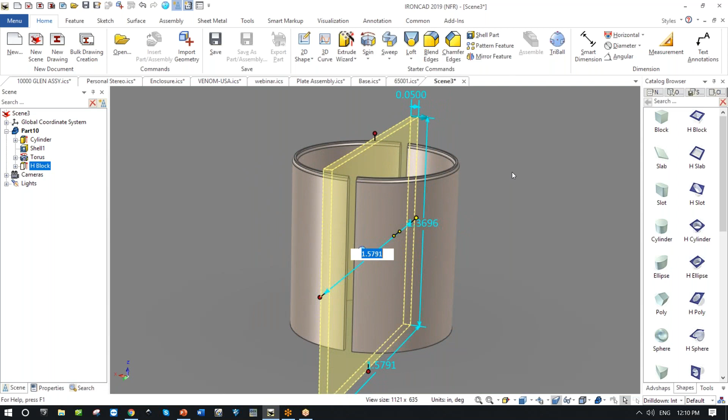Okay. Now, lots of ideas that you could do this with, and if you're going to be available tomorrow, they're exactly the ideas that we're going to be working on tomorrow.

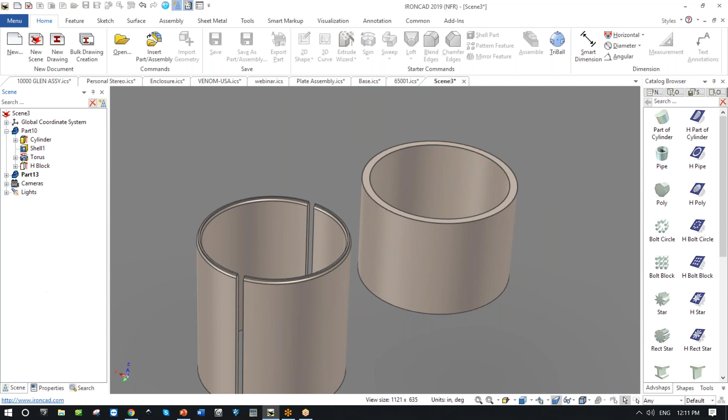If I look at this original part here and I go into the IntelliShape, they edit the cross section. I can go into the cross section and figure out what they've done. I didn't really want to do that, because I can come in and do this, and now I've changed it that way. I was just being super lazy.

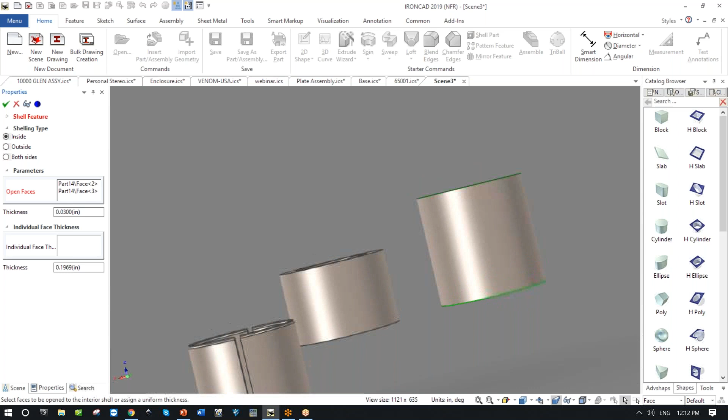If I'm not knowing exactly what you're wanting, I like shelling, because if I know what the thickness here is, there's no difference in it at all. Shell lets me say this face is open, this face is open, and the pipe is going to be 30 thou. So I needed to know what that was. That was easy for me to do. Yeah, I'm with you.